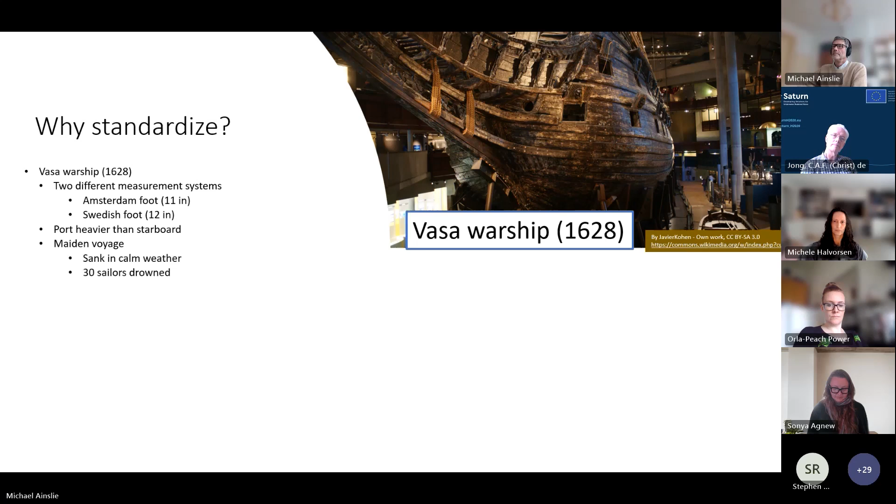A more recent example is a flight from Montreal to Edmonton in Canada. When the flight was fueled in Montreal, instead of loading it with 22,300 kilograms of fuel, an error was made with the unit such that they ended up loading it with 22,300 pounds. As a result, they only had half of the intended fuel load on board, and the result of that was that it ran out of fuel about halfway to Edmonton.

When they ran out of fuel, there was no airport within their reach. But what they did find was a former Air Force base, and the pilot was actually able to glide the aircraft for 17 minutes. Fortunately for the passengers, it was an experienced glider pilot.

They landed the aircraft at the former Air Force base, which had been turned into a racing track, and there happened to be a car race going on at the time of the emergency landing. I can imagine there would have been some frightened people on the racetrack as they saw this huge aircraft approaching them. The event ended happily - there were no fatalities.

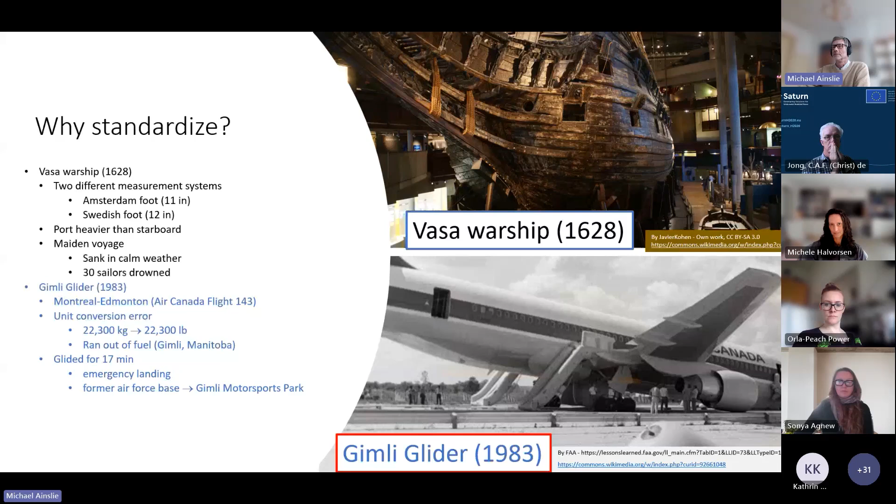The Acoustics Technical Committee is this thing that we call TC43. It's chaired by Douglas Manville. The Secretariat is the German Standardization Institute. It was created many years ago, nearly 80 years ago. Its scope is basically standardization in all aspects of acoustics.

And it has three subcommittees. The first is noise, second is building or architectural acoustics, and the third one, which is of interest today, is underwater acoustics.

This is just to get a feel for the total number of standards produced here. The important number there is 224 - that's the total number of standards produced by TC43 in those nearly 80 years. By contrast, the subcommittee for underwater acoustics, SC3, was created in 2011.

That's 13 years ago. The Secretariat is also held by the German Standardization Institute, and it's chaired by Stephen Robinson, who you'll be hearing from later today. The scope is basically all of underwater acoustics, and it has 6 working groups.

Now I'm not going to go through all 6. I'm just going to mention the first and the last - the other ones are less relevant today. The first one is measurement of underwater sound from ships, and you'll be hearing later from Chris de Jong about the work going on in that working group. The last one is aquatic bioacoustics, and you'll be hearing from Michele Halvorsen about that working group.

And this is just a summary of what I just said, highlighting the fact that TC43 SC3 is a very recent subcommittee by comparison with its parent committee, which explains why relatively few standards exist.

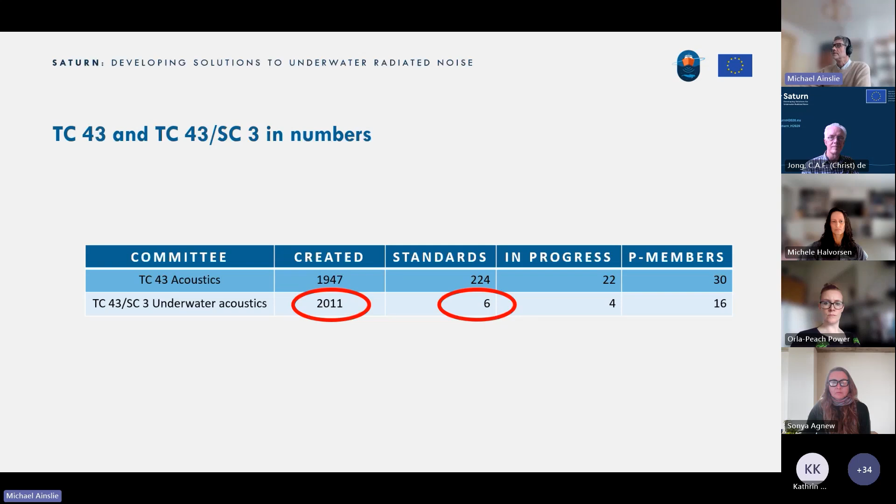So I'm now going to list - the previous slide said there were 6 standards, but I actually only know of 4, and I don't know where the 6th comes from. I'm going to list the 4 that I know of, all developed in the 4-year period between 2016 and 2019. This work was started well before that - it started in 2012 - but this is when the first one was published in 2016.

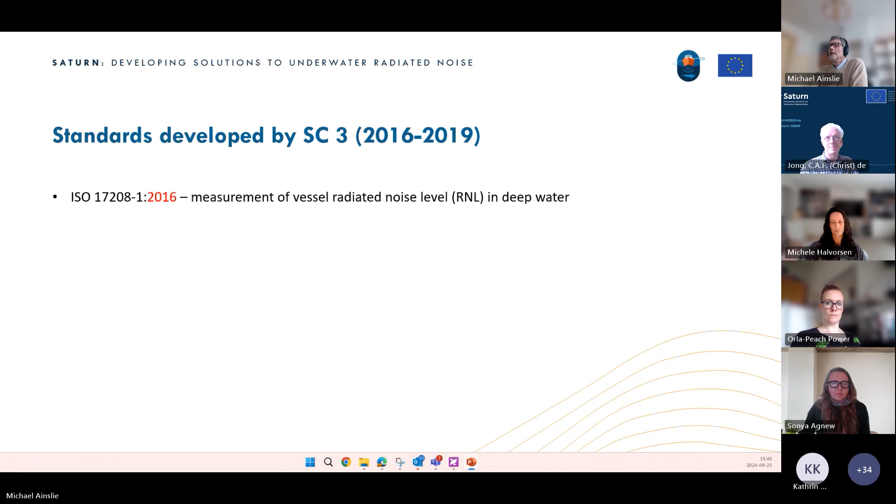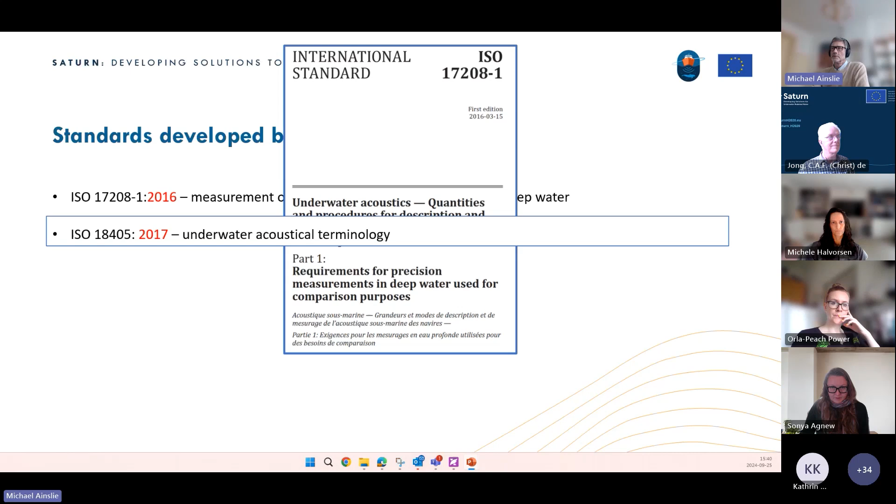It's for the measurement of underwater radiated noise in deep water, and this is the title page from that one. The second one was published in 2017 - this underwater acoustical terminology, and here's the title page for the terminology one. The third one was for pile driving, measurement of underwater sound from pile driving, also published in 2017.

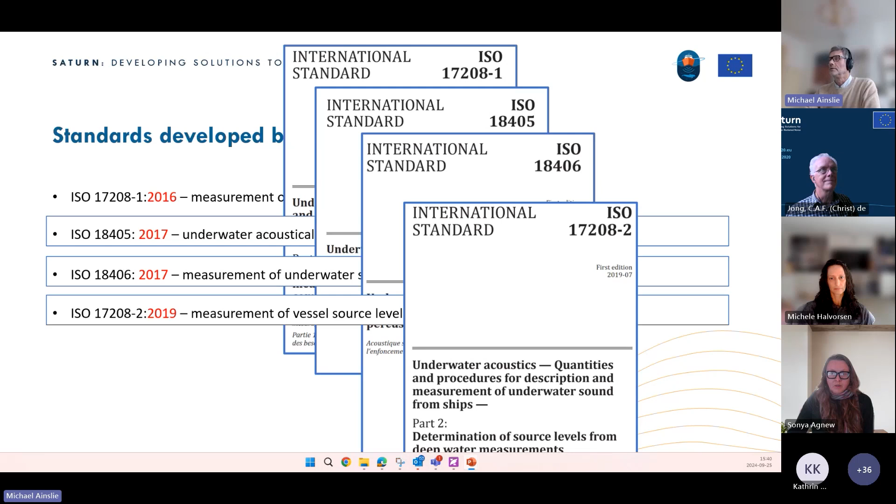And the fourth one, published in 2019, was also a second URN standard, and the difference is that the first one was radiated noise level, the second one is for source level. Chris will be explaining all about source level and radiated noise level when he talks.

I'm going to say a few words about what I call a terminology pyramid, and you'll understand what I mean by a pyramid as I go along. It's best if I just talk.

At the base of the pyramid is something called ISO/IEC 80000, a series of fundamental scientific standards, which I've heard referred to as the Bible of ISO. It pins down fundamentals for mathematics, electromagnetism, mechanics, and of particular interest for us, acoustics, which is part 8 of that series.

Then the next level up in the pyramid is ISO 18405, which is the international standard for underwater acoustical terminology.

Based on 18405 is the SATURN terminology standard, which I'm calling here D2.3, an abbreviation for deliverable 2.3. SATURN produced a terminology standard built on ISO 18405, but expanding it to include vessel acoustics and bioacoustics as well.

You'll hear more about 23990 later from Michele, but that's an ongoing standard currently in development, also built on ISO 18405. It will incorporate parts of the SATURN terminology standard, but also terminology from elsewhere, to produce an international standard for bioacoustical terminology.

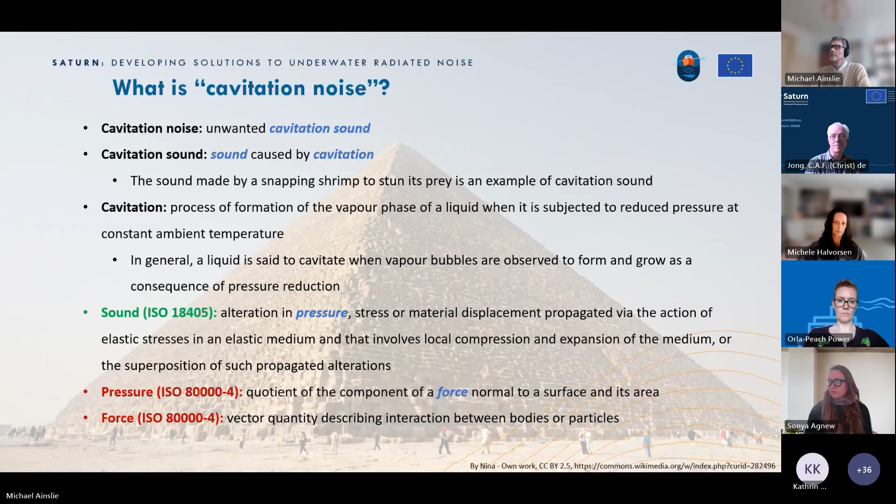That's my purpose here. This is my last slide, and I just wanted to give a few anecdotes that you might be interested in hearing. The first one is about the decibel.

Now, anyone who's worked in underwater sound or acoustics generally will have heard of the decibel. What you might not realize is that although there was a formal definition of the decibel, the standard that defined the decibel was withdrawn in 2019, and since then, that unit has been undefined.

The second one is to do with the word impulsive, which is defined differently in Europe than in the United States, such that a sonar pulse is considered an impulsive sound according to the European Union's Marine Strategy Framework Directive, whereas it's considered a non-impulsive sound according to the NOAA guidelines in the United States.

And the third one is that international standard 63 and 125 hertz frequency bands are not 1/3 of an octave wide, but 1/10 of a decade wide. And that concludes my talk.

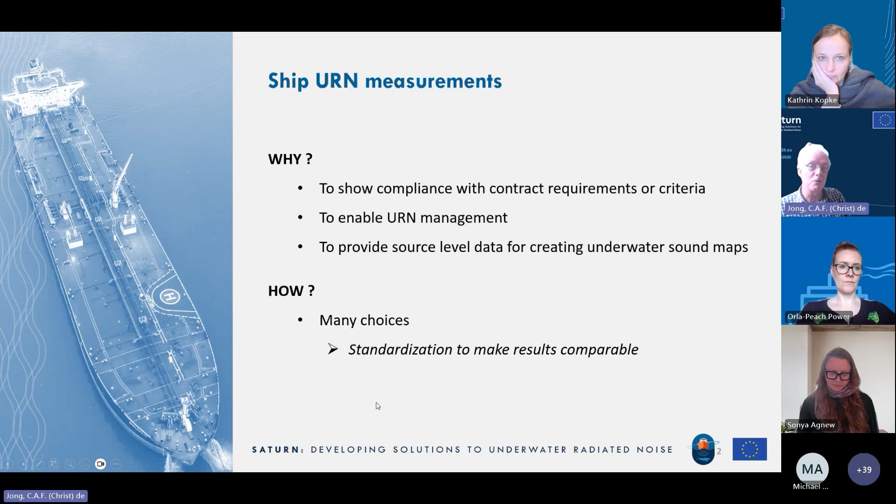Measuring the underwater sound of a ship is the topic of this talk, and there are a lot of choices to be made on how to do these measurements. Because there are so many choices, it makes a lot of sense to make use of standards, so that if you measure something, you measure the same as everyone else is doing.

First, I want to illustrate the amount of choices you have to make. If you want to measure how much underwater radiated noise a ship produces when sailing, you have to define at what condition of the ship you want to measure, because it differs. If the ship changes speed, or if the draft is different due to different loading, or if it's maneuvering, all these have an influence on the amount of underwater radiated noise. So you have to decide for which of these cases you want to measure it.

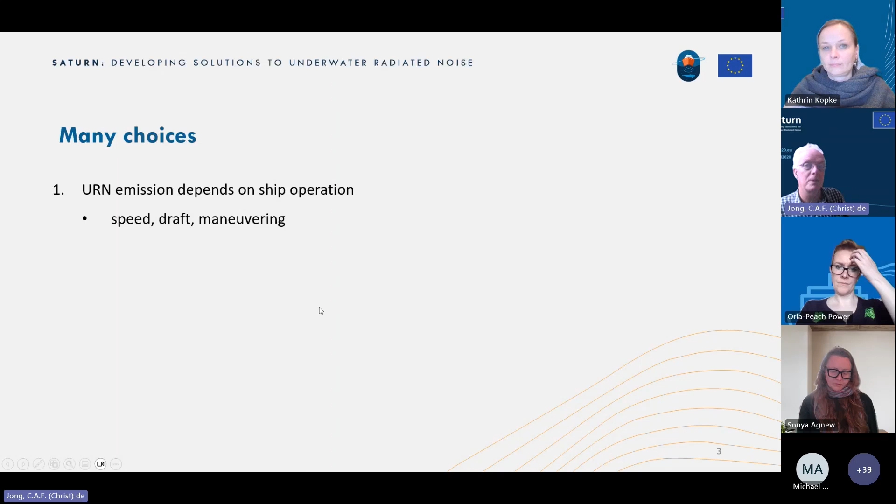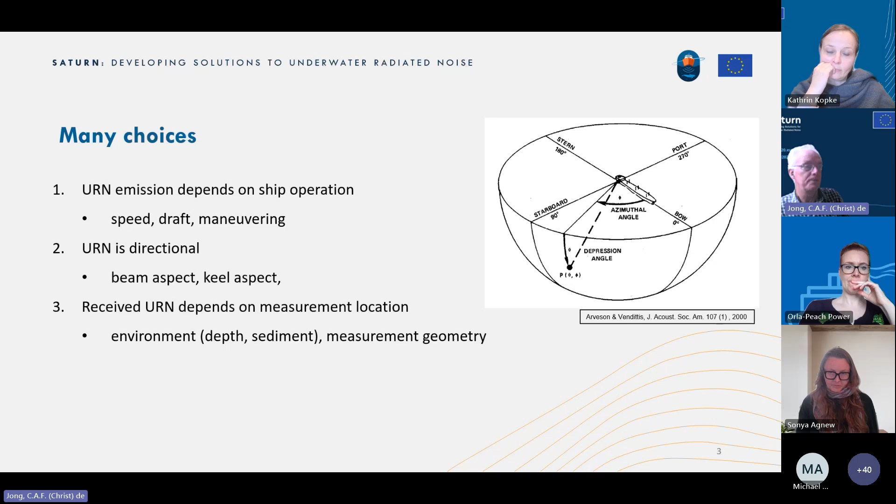The ship sends out sound in all kinds of directions, and you have to decide where you're going to measure and what you want to know. You can't measure everywhere, so you have to consider things like the azimuthal and depression angle, or sometimes people speak about beam aspect, looking at the ship from the sides, or keel aspect, looking through it from the bottom of the water. It depends on where your hydrophone is and where you do this measurement. The geometry is important, but also the environment in which you do this measurement - the water depth and sediment properties may have an effect.

That's another choice. Then, what kind of metric do you want to measure? Because sound is quite a variable thing, and you have to define what quantity you want to measure for the ship. There the terms source level and radiated noise level, which Michael already mentioned, come into play - I'll come back to that on the next slide.

As a last point, are you going to measure this ship knowing that it's going to be measured, with it cooperating and doing things you want it to do, or are you just laying a hydrophone somewhere and measuring the ship that's passing? That's the difference between cooperative ships and ships of opportunity. For the second part, there are actually no standards yet. For the first part, there are some standards that I'm going to discuss.

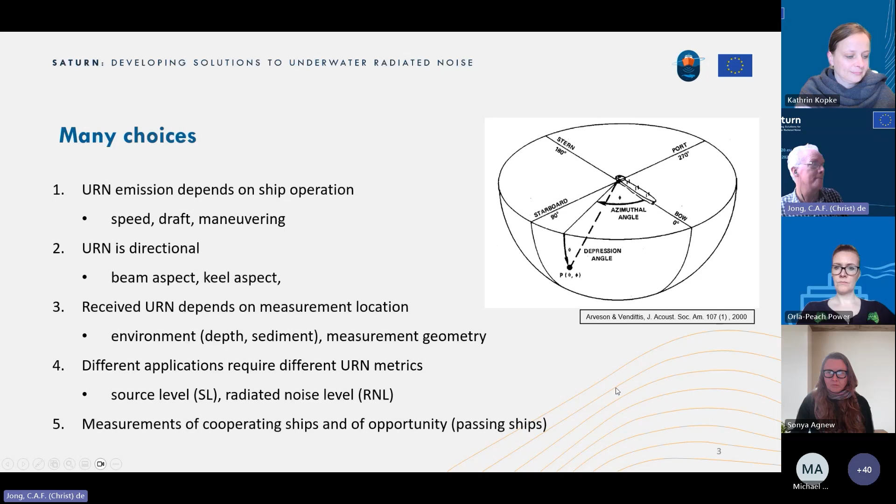So first, this source level versus radiated noise level issue. Source level in underwater acoustics is defined as the sound pressure level you measure somewhere far away from the ship in an idealized environment, affected by propagation loss in that environment. If you correct for the propagation loss, you get a source level. It has a direction, so it may be different in different directions, but it's a property of the ship, independent of the environment and geometry - though direction may have an effect on the geometry. It assumes you're in an infinitely large space where sound can freely travel in all directions.

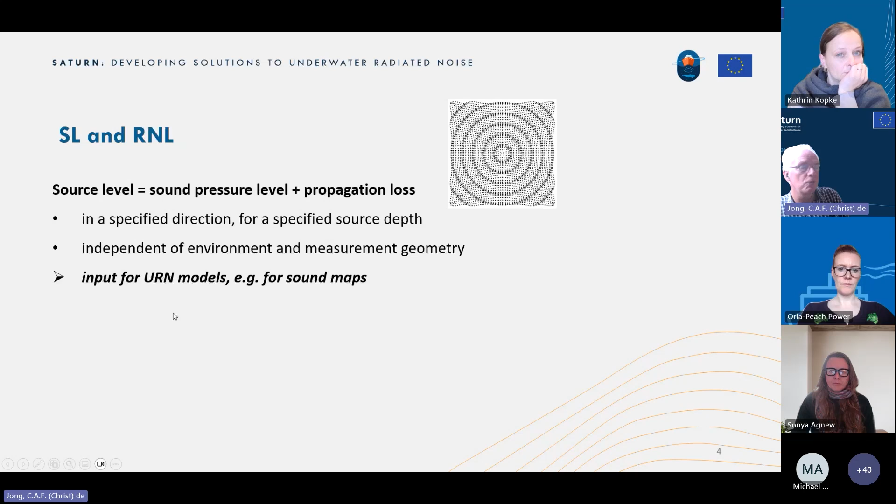That kind of source level description of the ship is mainly relevant for modeling, as input for sound maps. Radiated noise level, on the other hand, is more directly related to what you measure when a ship is sailing. One important aspect when the ship is sailing is that sound is generated quite close to the water surface, and reflections at the surface affect how the sound radiates. This creates an angle dependence in the radiation, so what you measure on the ship depends on which angle you look at the vessel.

If you define this environment, you can do a measurement, but you have to define where. If you measure all ships under the same angle, you can compare their sound, and that's what you do when you measure radiated noise level. So these are two different things.

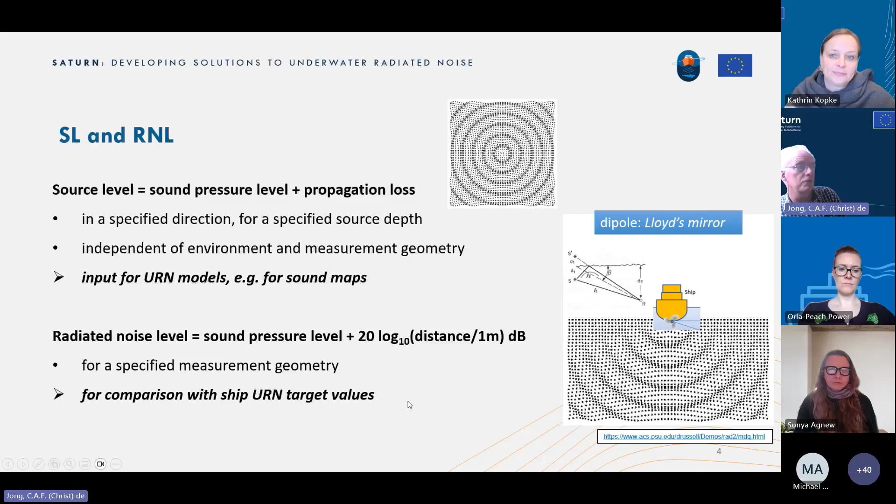Measuring ships is not new. It has been done for quite some time, but mainly in the defense field, in the naval field. NATO has already for a long time standardized measurements of their ships, and there are two standard agreements in NATO that determine how to measure ships, with two particular standards.

One standard is for measuring ships related to torpedo and sonar detection threat, mainly for sources at some horizontal distance from the ships. The other is more related to mines on the seabed, where it's important if the ship is above a mine, so you look at the ship from below. These are different types of measurements with different procedures.

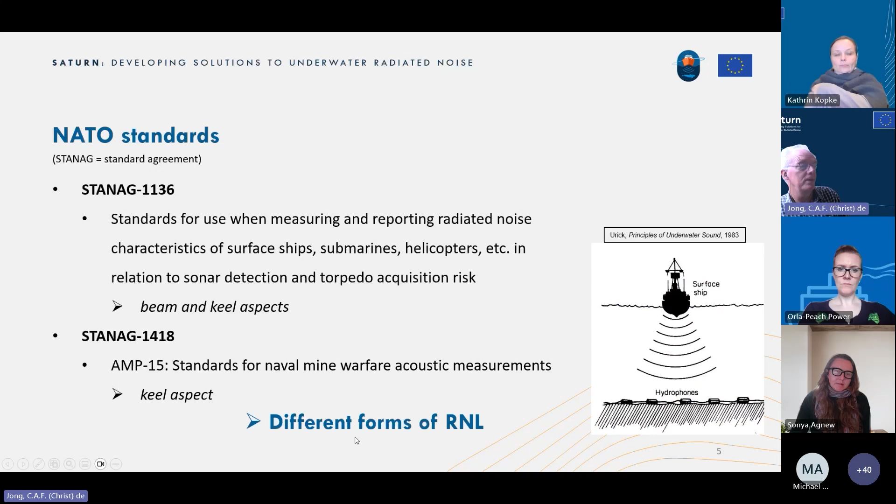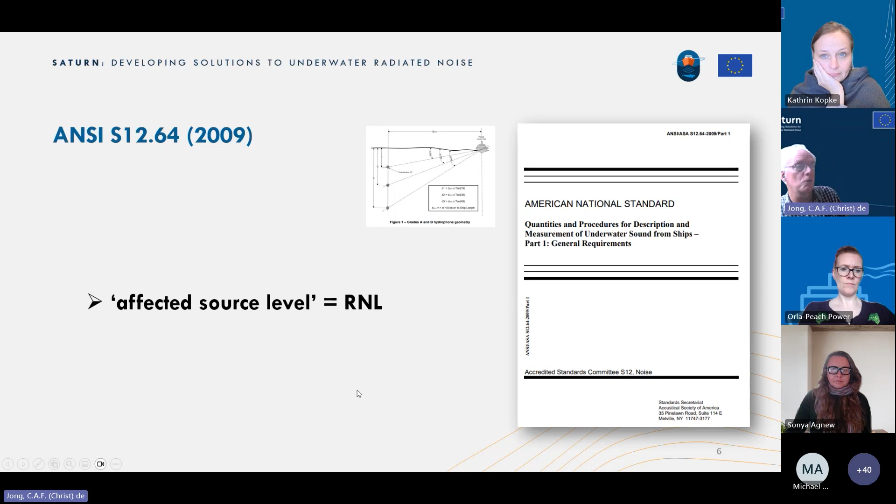These standards are not directly applicable to applications like mapping, for example. These different forms of radiated noise level produced by these standards were a start, but they were taken from the defense field into the commercial, non-military field by ANSI, the American Standardization Organization, somewhere around 2009. ANSI produced the first standards for measuring underwater radiated sound from ships. The quantity measured by this standard is called affected source level, related to the radiated noise level, but that term was only defined when this standard was taken internationally and picked up by ISO, where a working group started on the ISO 17208 series of measurement standards for ships.

This radiated noise series, developed by the working group that Michael introduced, now has three parts. The first two have been published: the first standard in 2016, and the second part in 2019, which allows determining source level, while the first was for radiated noise level. The third part is still under construction. They are all for ships that are cooperating.

This whole process shows how many years pass between starting work on a standard and finally publishing it, involving steps where all ISO members are allowed to vote in a ballot. After a new work item proposal, there's a committee draft, then a draft international standard, then a final draft. With the third part, we're now at the stage of creating this final draft. The project limit date is sometime mid next year, so we hope to have the standard finished by then.

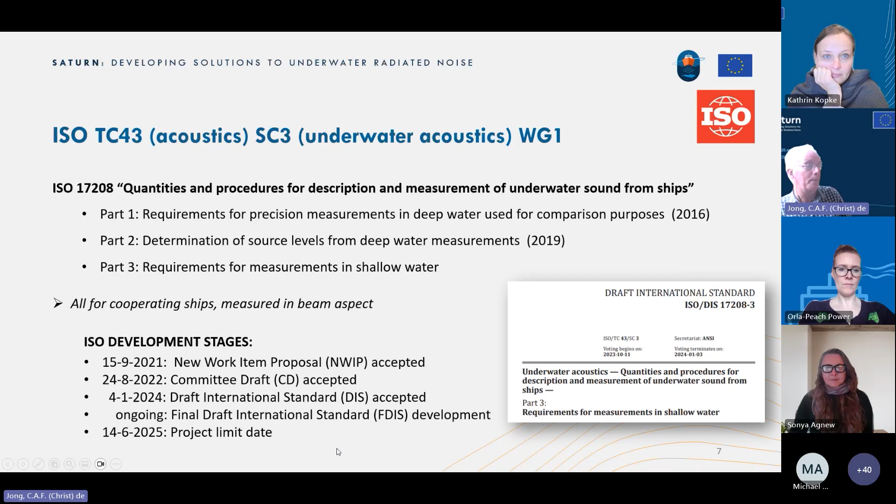Such a standard contains a list of chapters describing the references it's based on, the terms being used, and general requirements for the environment to do measurements in, etc. It describes what configuration to take for the measurements, how to process the data to get sound pressure level, and then how to calculate source level or radiated noise level. It also gives instructions on the uncertainty to be expected and how to report results. All these details matter for standardization.

The first part published by ISO is a standard for measurement in deep water. It measures radiated noise level under a certain specified angle, measuring the ship while it's passing a hydrophone, as shown in the lower plot. It measures as long as the ship is passing over an angle of about 60 degrees opening angle, and over this period the sound is averaged. It uses a number of hydrophones in a vertical array, observing the vessel at vertical angles between 15 and 45 degrees, so the radiated noise level is averaged for these angles when looking at the ship.

And it requires quite deep water, sorry, that was a bit too quick. Quite deep water: it must be 150 meters, or for bigger ships, 1.5 times the overall ship length. You also have to be about a ship length or 100 meters away from the ship to do these measurements. Then you measure the radiated noise level in the frequency range from 10 Hz to 20 kilohertz in decidecade bands.

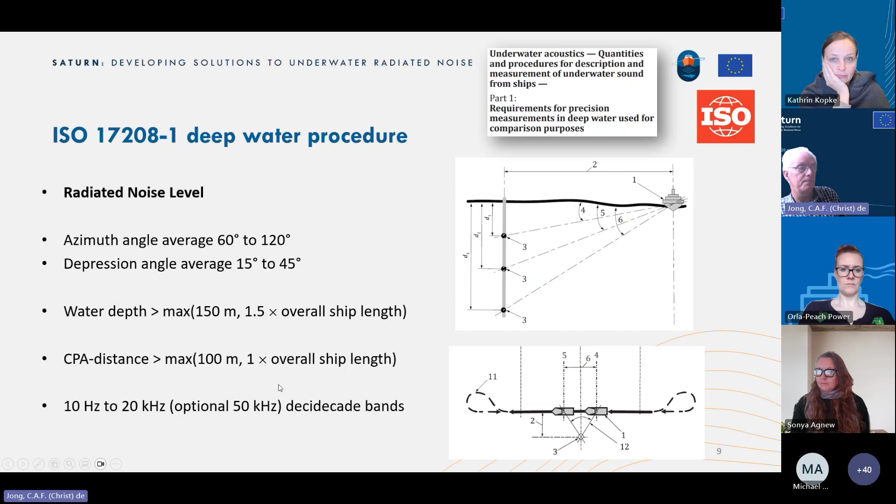An example of such a measurement was carried out in the SATURN project by TSI. They measured the Spanish research vessel Ángeles Alvariño, which is about 50 meters long, near the Canaries. The figure below gives an example of a series of measurements according to the Part 1 standard, showing the spectrum of the radiated noise level of this vessel.

There is some variation because the run conditions were different—they were sailing in different directions at slightly different conditions of the vessel. So there is some spread in the measurements, which illustrates how important it is to specify the conditions under which you measure the ship. It also illustrates that the standard requires a comparison with background noise. In this case, all sound below 200 Hertz appears to be dominated by background noise, so this is not noise from the ship, and that has to be made clear in the reporting.

That's an example of how a standard measurement of radiated noise level is done. If you want to use this for modeling, you need source level. Therefore, the second part of ISO standards provides a procedure to convert radiated noise level to source level. The difference is adding a correction to the measured radiated noise level, and this correction depends on the source depth. So the source level is only valid if you specify the source depth at which it is defined.

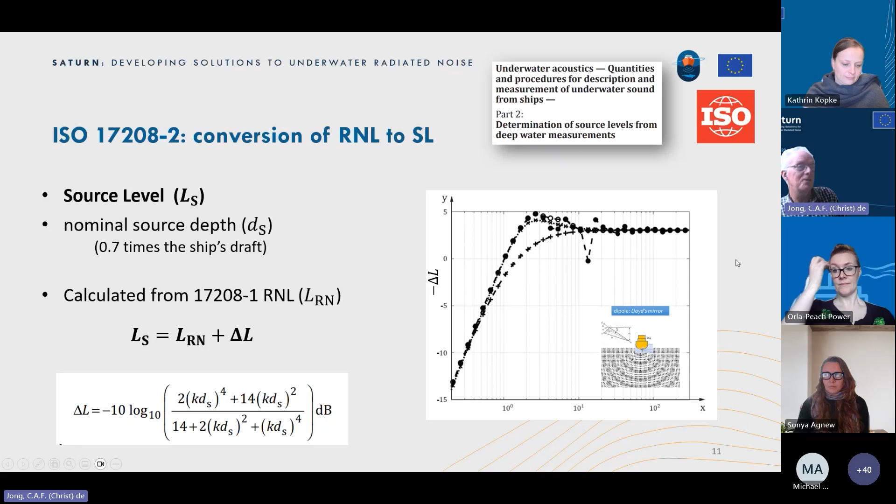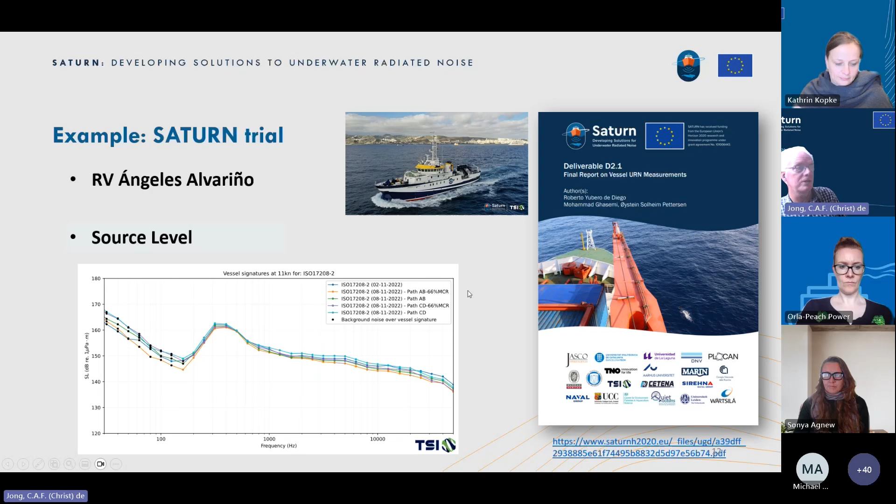It provides a curve that approximates the difference between the two, giving insight into what the actual source level is. This was applied to the measurements by TSI. The plot now shows the radiated noise level shown previously, and if you go to the source level, the levels at low frequencies—in this case mainly dominated by background noise—increase a bit, and the levels at high frequencies decrease a bit. That's the source level shown in this plot, and this can be used in sound maps.

That's all very nice, but as said, you need quite deep water for measuring ships according to this standard, and that's a practical limitation for many applications. If you have to take your ship to an environment where the water is 150 meters deep, or 450 meters for a ship of 300 meters length, that has a large impact on feasibility and cost of these measurements. So there was a clear demand for a more flexible measurement procedure.

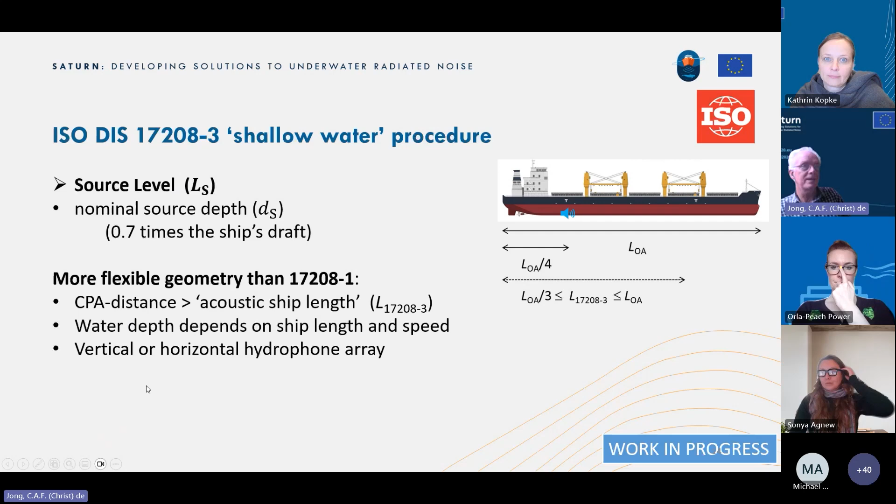That's why we're now working on ISO Part 3. This is more complicated because in this case, the sediment and the water depth—waves reflecting at the sediment—play a role, and you have to correct for these in some manner. This is work in progress, so I can only show where we are now. The standard calculates the source level of the ship, again at the same nominal depth as for the deep water procedure. We've tried to make it possible not only to do measurements in shallow water, but also to offer more flexibility in the measurement geometry.

Instead of limiting the distance for the measurements to the real ship length and 100 meters, there's now a requirement that you can get a bit closer if you know that the source of the ship is, for example, mainly the propeller—then the effective length of the source is shorter than the total length of the ship. You can get closer, and there are some limitations on how close you can get, which are specified in the standard. The water depth for the measurements is somewhat dependent on ship length and speed, and the standard provides tables or formulas to calculate that.

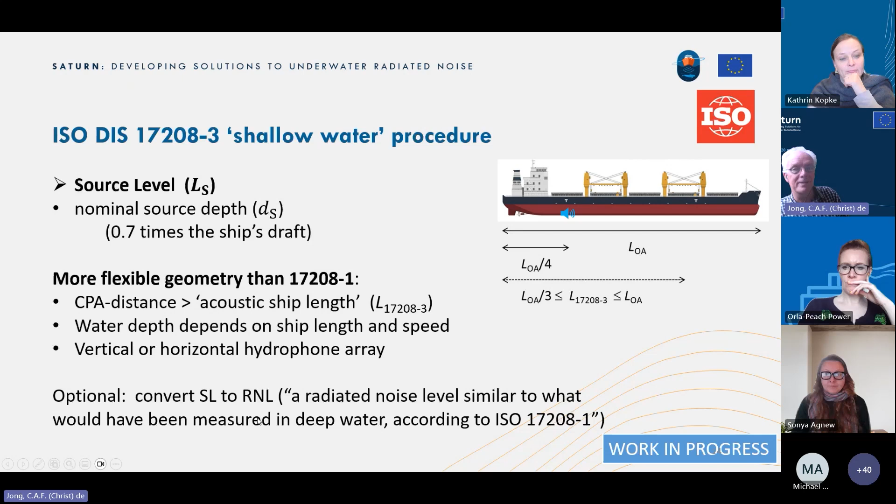It allows for vertical or horizontal hydrophone arrays, which I'll illustrate on the next slide. There's also an option, once you have the source level, to go back to the radiated noise level, so that you can compare your output with the first part of the standard. So, some idea of the flexibility.

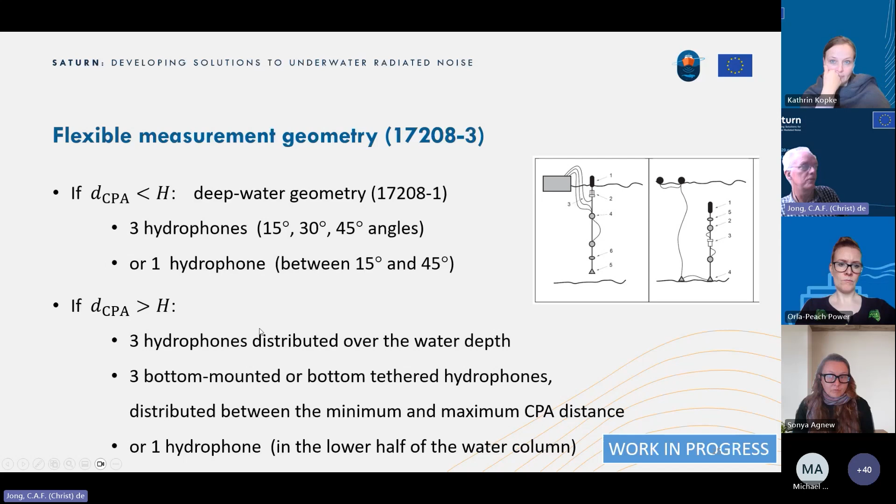If you're able to get your measurements closer than the actual water depth, then you're back to the deep water standard, so you can use the same geometry. If not, if your measured distance, the d CPA, is far greater than the water depth, then you have an option to choose between either a vertical array of three hydrophones or a horizontal array of three hydrophones, or even one hydrophone with some loss in certainty, so increased uncertainty in results. So that gives an idea of what is described there.

You do a measurement of sound pressure level, and you add propagation loss to calculate source level. And the draft international standard now provides a formula called the seabed critical angle formula. I'm not going to explain the details, but this is a correction for the propagation loss, based on the angles under which you're observing the vessel. The seabed properties are quantified in terms of the seabed critical angle, and then there are some geometry and frequency parameters in there, and with that formula you can calculate the measured sound pressure level to a source level.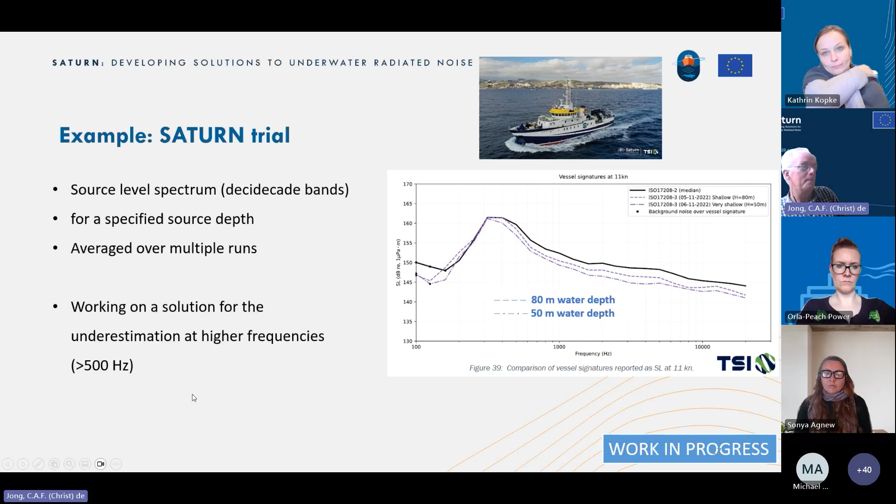That's something we're working on at the moment, and I think we have found a solution to modify the formula to correct for part of this difference, and that will be proposed as part of a new standard, which we are going to discuss later next month. So that's giving you some insight into where we are with the development of the standard.

What you need to realize is you can't just go out and measure a ship. You have to make a lot of choices, and the details matter. The ISO standards provide you with guidance to make these choices, which is relevant to do so. We are working hard towards a final draft international standard, which will then go out for ballot, and you may expect something to be published by next year. And that concludes my part. Thank you.

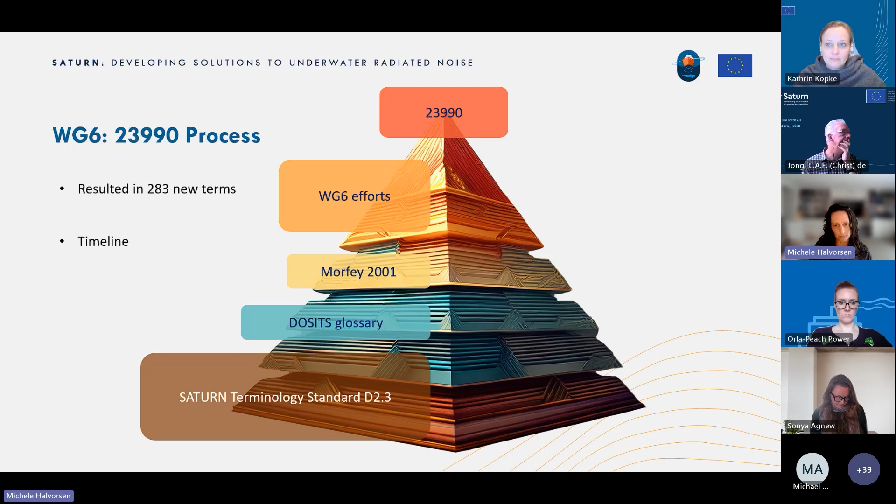So our timeline for this is next. Christ talked about this with his section already, under some of his standards that are getting close. I think it's good to hear how these processes go because it seems kind of mysterious on the outside looking in, I think.

So for the terminology standard, as I mentioned, this group started in November of 2023. We have our first working draft, which has 283 terms in it. We're aiming to get a committee draft submitted in November 2024, so just in a couple months. The working draft is going to be talked about at our next meeting, the 4th meeting for Working Group 6. So in these few months, we've had 3 and are about to enter into our 4th meeting.

We'll get comments back from that committee draft in about February, and then we have to address those with the working group and submit a draft international standard. That takes about another 4 or 5-ish months for us to get that turned around, and that goes for a ballot, the draft international standard. At that point, we would get results back from that about December next year, and then it would move into the next steps, so final publication of about October 2026.

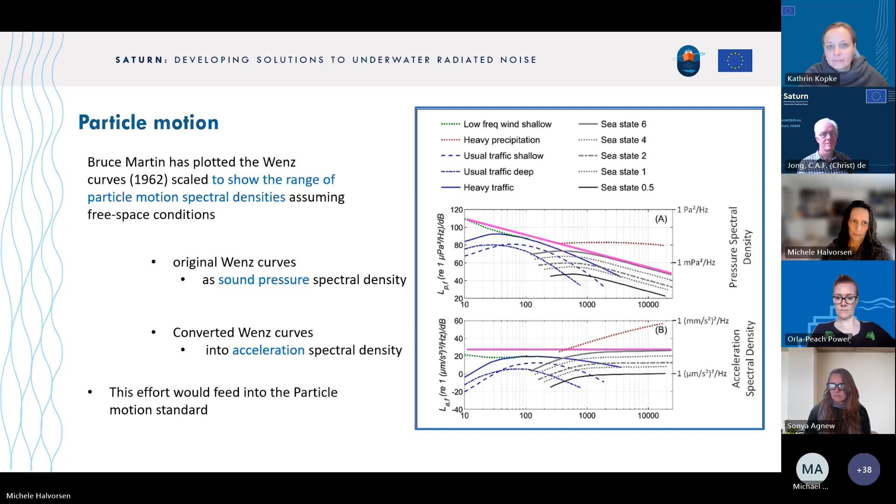I mentioned, I guess this is the next step, we have a 4th meeting for the ISO working group coming up in October. It's part of the ISO plenary meeting occurring in Berlin. I'm not sure if Stephen's going to talk about that, but our working group will be meeting there to discuss next steps and finalize the working draft to submit to our committee. If you're interested in getting involved, please stick around and listen to Stephen Robinson, because I think he'll go into that a bit more. Thank you.

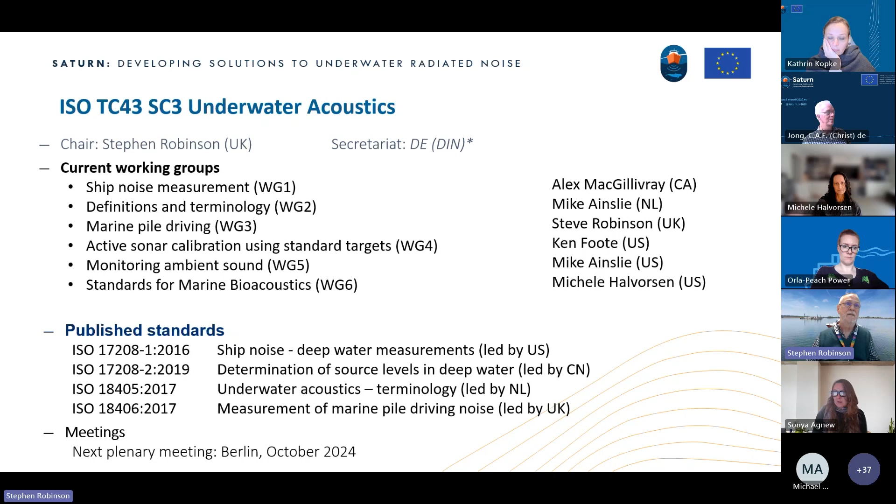Just before we move on to Working Group 3, a little shout out for SATURN. You probably realised from what you've heard so far that SATURN has contributed a lot to the work in Working Group 1 and Working Group 6, in particular the ship noise standard that Christ de Jong described, and the one Michele just described, which is just starting on the terminology of bioacoustics. It's great credit to this project, of which I am not a part, that its outputs are feeding into these standards.

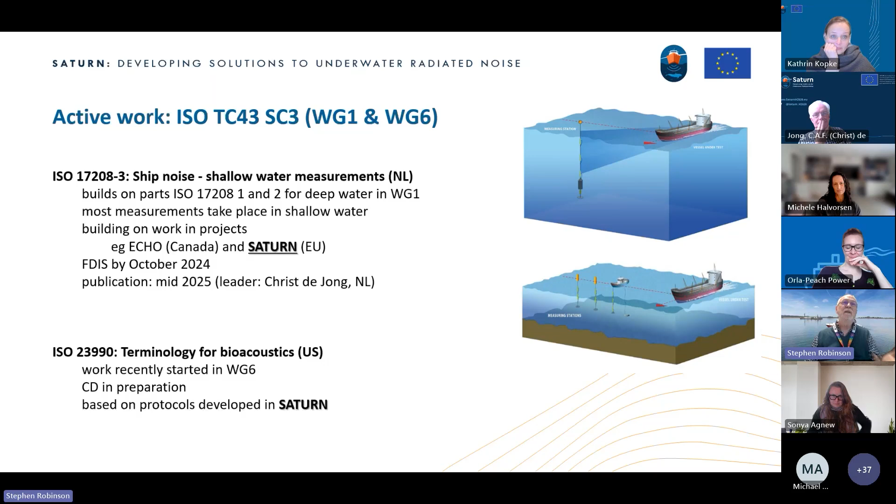So Working Group 3, what's going on in that part of the committee? This covers standards for marine pile driving, a method of construction used in the ocean, particularly for things like oil and gas platforms, bridge foundations, but in particular offshore wind farms. We've already had a standard from this group on how to measure the sound radiated during this construction technique. And this particular one, 7447.

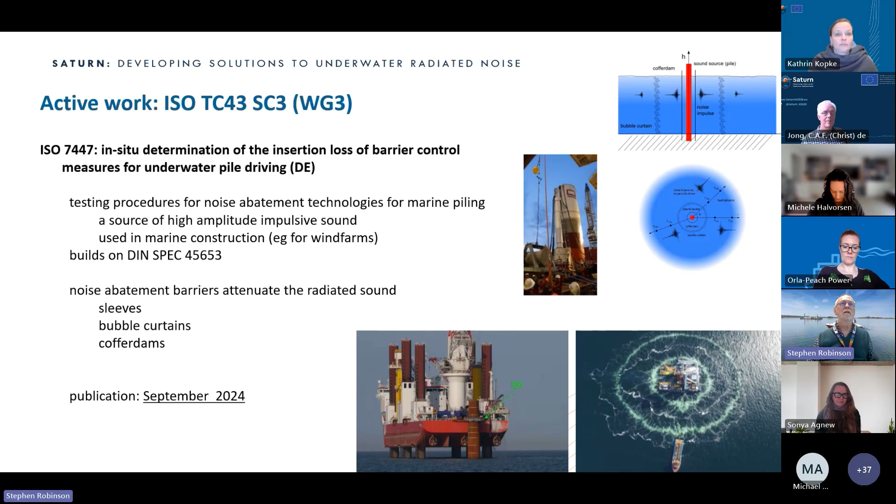This covers a description of how to test noise abatement technologies for marine pile driving. These consist of anything from sleeves or bubble curtains, designed to attenuate the sound radiated from this particular source of impulsive sound. You can see some pictures of these types of technology on the slide. This has just been published literally this month. This is one of the missing standards Michael talked about earlier when he said he couldn't find all 6 standards this subcommittee's produced. This is the latest one.

Working Group 5 covers the measurement of underwater ambient sound in the ocean. This again covers procedures for measuring ambient sound, everything from terminology right through to equipment, deployment, data analysis and reporting. And it builds on the outputs of other recent research projects, for example a couple of EU projects, in particular JOMOPANS, and also a US project called ADEON.

This has reached quite an advanced stage. The so-called FDIS, the final draft, is due after the Berlin meeting we have in October. So the likely publication date for this is mid-2025.

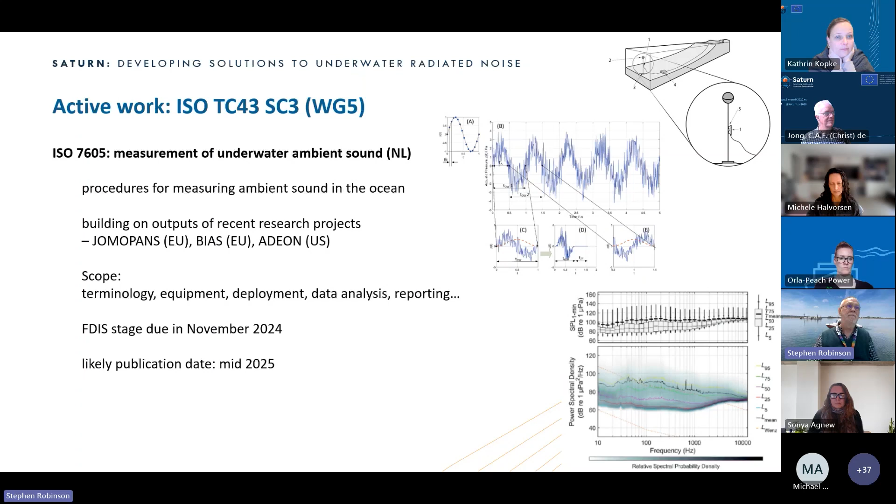Some other examples of possible future work, which are on our wish list at the moment: measuring explosive sources, in particular in Europe, things like clearance of UXO, unexploded ordnance that lies on the seabed, which can be extremely loud, impulsive sources of sound. This builds on preliminary work done in the UK, where we've already produced a sort of good practice guide, which has been adopted. It's quite limited to UXO only, but we can certainly build on that, hopefully, and produce an international standard, perhaps broader in scope.

On ships of opportunity, measuring those - here we're talking about building on work from existing projects, such as the ECHO project and possibly SATURN also. We're talking about measuring ships that are in transit, using some kind of semi-permanent static measuring station. So here, unlike with part 3 of 17208 that Christ so comprehensively described, we've not got control of the ship. There's no cooperation from the ship. It's just in transit going past.

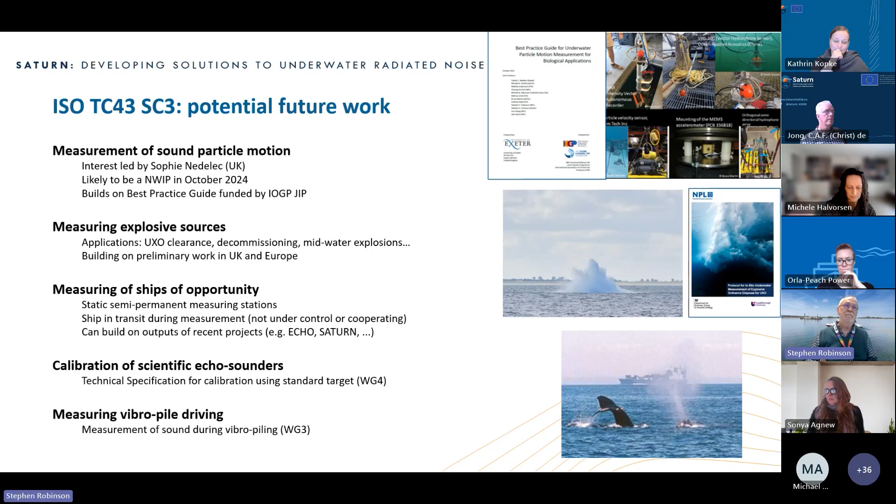And there are a couple of other items: calibration of echo sounders, which is currently going on in Working Group 4, and a potential for starting some work soon in vibropile driving measuring in Working Group 3.

So then moving on to this IEC committee that I mentioned, the International Electrotechnical Commission. The relevant committee here for underwater acoustics is TC87, Working Group 15, which covers the calibration of underwater electroacoustic devices. They have produced a number of standards over the years, and I'm the convener of that standard, so there's quite a close relationship between this working group and TC43 in ISO.

It covers properties of hydrophones, calibration of hydrophones. The two parts go from frequencies below 1 Hertz right the way to above 1 megahertz. And the latest one, just published this year in April, is calibration of vector sensors.

Acoustic vector sensors include sound particle motion sensors, such as the ones that might be used to measure sound particle motion in the ocean using that good practice guide we heard about earlier. And there's even an international electrotechnical vocabulary, the IEV, which covers terminology.

Part of the work we undertook was to update that to try and make it more accurately reflect the recent developments in things like ISO 18405 and others, and ISO 80000, which had come more recently, and that was a particularly old standard which we updated in 2021.

The latest item, which will be starting soon, is calibration of digital systems, digital recorders and hydrophones, for which there currently is no international standard.

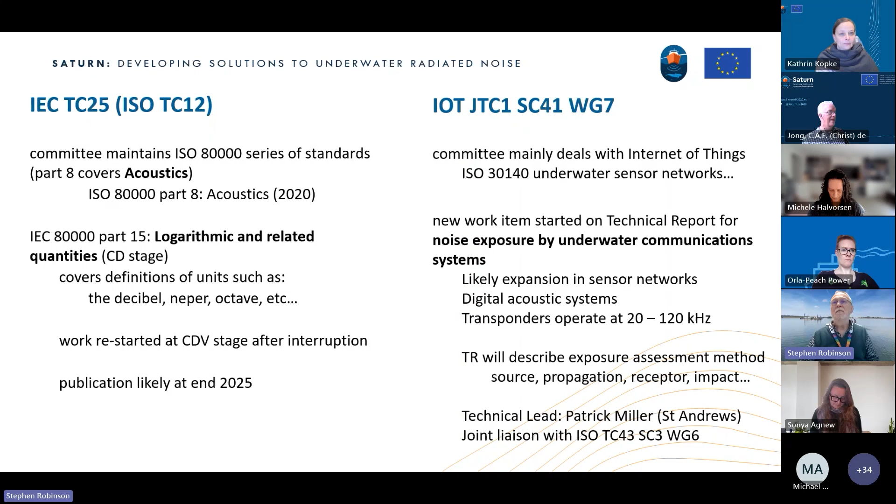They're working on a technical report which will describe how the exposure assessment should be done, using the practical methodologies that most people use, separating it into source, propagation, receptor, threshold levels, impact, and so forth. The technical lead for that is Patrick Miller from St Andrews University, and there's a joint liaison with Working Group 6, the one that Michelle has just described, to provide input into the process there.

So for some final thoughts on standardization, you'll have perhaps realized from what I've said and what some of the other speakers have said that quite a lot of the standards work builds on existing research projects and their outputs.

That's either because the projects themselves are enlightened enough that they think standards are important and worth developing, but it can also be for a selfish reason. If you're developing a project and you want to demonstrate increased impact or establish a legacy for your project, having a work package or activity to feed into international standards can be a very useful goal.

We're very lucky that some of the ISO work we've got has fed directly from projects we mentioned, such as the ship noise 17208 part 3, feeding from projects in Canada like ECHO, and the SATURN project we're talking about here. I mentioned that 7447 was led by Germany, and that fed on work produced in Germany to produce their own standard, which we built on.

And 7605, the ambient sounds standard, builds on both EU and US projects, which developed their own measurement protocols as a starting point for building an international standard.